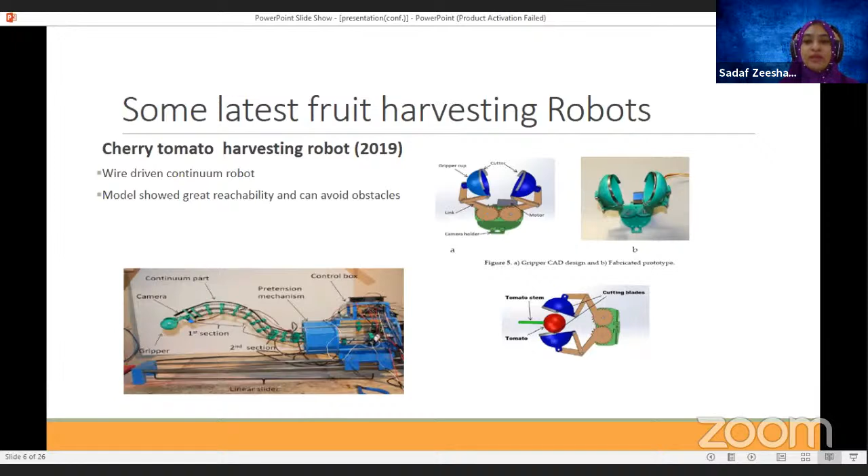Similarly, another design that has been recently made is a 5 degree of freedom robotic arm with scissors and grippers. So it is like a flower. It engulfs the fruit, the strawberry fruit, and then it closes. And there's a separate scissor mechanism that has been designed to cut the branches of the strawberry.

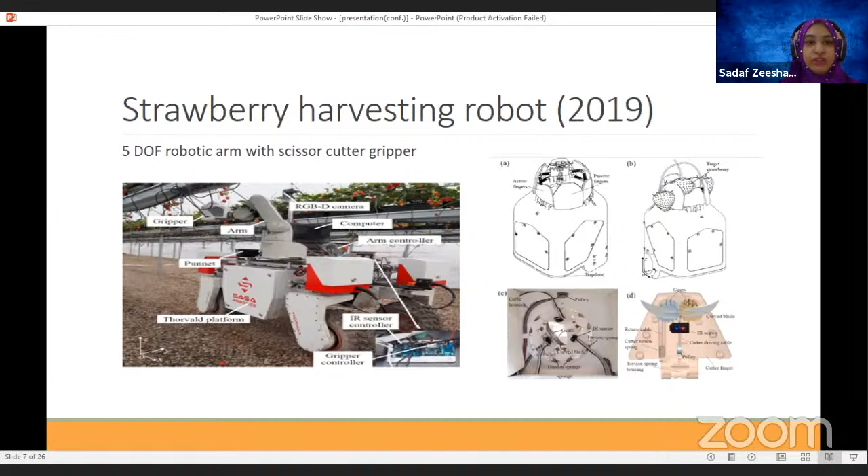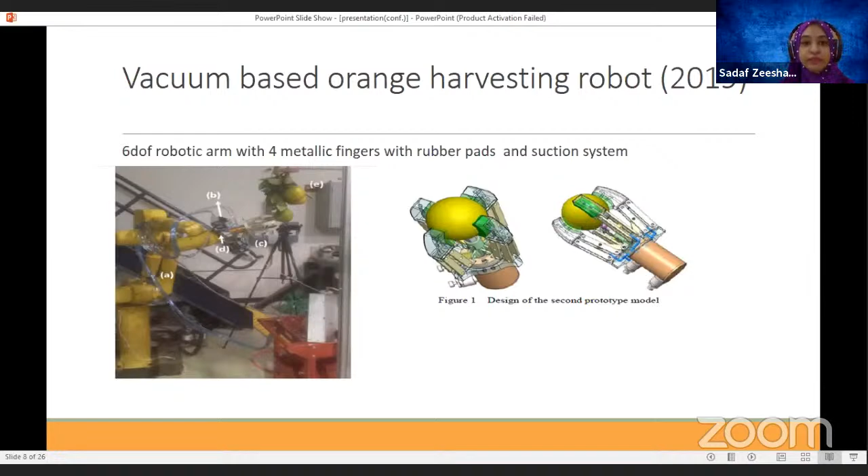Similarly, a vacuum-based orange harvesting robot has also been recently designed, which consists of a 4 gripper finger with small pads attached to the edges to prevent damage. And it's based on a suction system so that the grip holds and it is not disrupted. Another design that has been recently drawn is similar to the previous one, but it is able to avoid obstacles by pushing the irrelevant fruit and moving directly towards the target fruit.

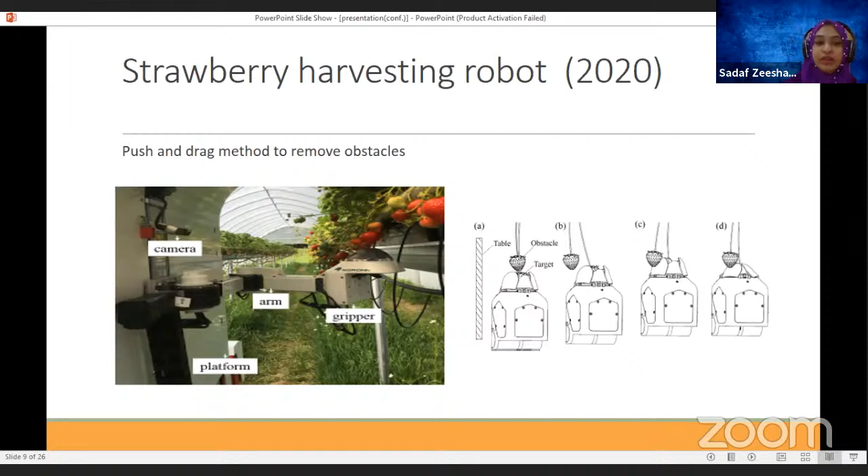So our research is also based on a fruit harvesting robot. Our research will focus on the automation of harvesting of one of the top fruits in Pakistan, oranges. Oranges are exported to many countries, the oranges of Pakistan are very famous, and it's one of the top export fruits in Pakistan. So our research project aims at designing and developing a 6 degree of freedom robotic arm with a soft gripper. We are not going to use a metallic gripper. We're going to use a custom designed and optimized soft gripper, which is going to help harvest oranges in the best possible manner.

The prime design parameters include modeling of a 6 degree of freedom robotic arm. We're going to do the path planning and optimized gripper design for orange picking. Then we have detection of the oranges by using RGB color recognition and a control system design using Arduino. For this presentation, since there are a lot of parameters, we're going to focus on the two prime areas, that is the path planning and the optimized gripper design.

So the objective is to design and fabricate an orange harvesting robot to assist in quality picking of fruit best suited for export, and to validate through experimental testing in the field the efficient and quality fruit pickup by the orange harvesting robot. The problem statement, the reason why we wanted to do this project, was to address the gap in our agricultural sector and the issue of not using a lot of technology in the agricultural sector. So we want to address this gap by using an automated agricultural robot to enhance the export quality of fruit harvested. And we want to prepare Pakistan for the fourth industrial revolution by adopting emerging technology and to increase food production as well as quality.

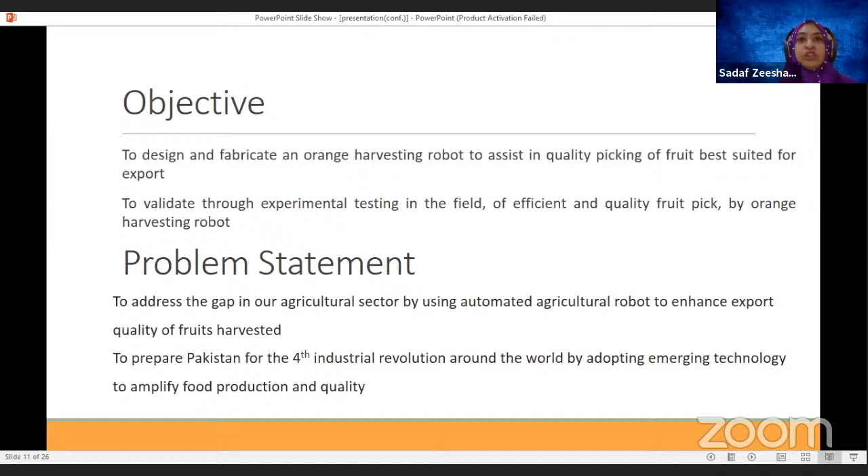So the first thing that we did in the path planning was the kinematic analysis. The kinematic analysis is made up of two parts, the forward kinematics and the inverse kinematics. In the forward kinematics, we determine the end effector position. So the robot will determine the exact position of the end effector, and this includes three parts. First is the defining of frames. Now we define the exact number of joint angles in the frames. As you can see in the upper picture, we have defined the frames, where red shows the x-axis, yellow shows the z-axis, and black shows the y-axis.

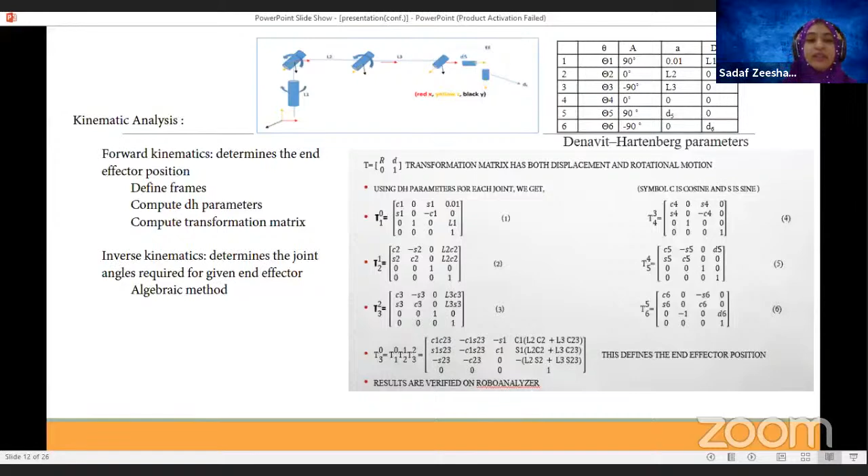Next, we are going to determine the joint angles for the given end effector, and this process is known as inverse kinematics. Now, there are many methods used for inverse kinematics. The method that I have used is the algebraic method. In the algebraic method, we use various algebraic formulas, the cosine rule, and projections, and then based on those projections, we determine the joint angles.

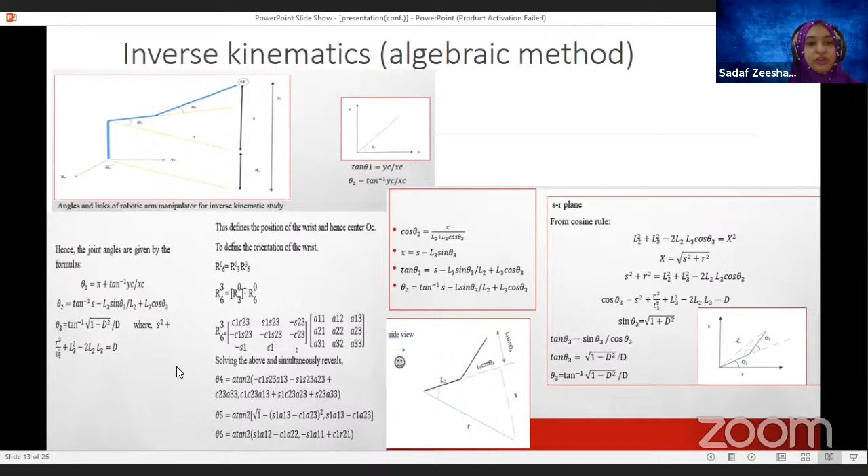So we have calculated joint angles for all 6 joints: theta 1, theta 2, theta 3, theta 4, theta 5, and theta 6. This is all done based on the algebraic methods. Now, once the forward and inverse kinematics have been done, we use the software RoboAnalyzer to verify if what we had calculated was correct. So, does this kinematic analysis actually work?

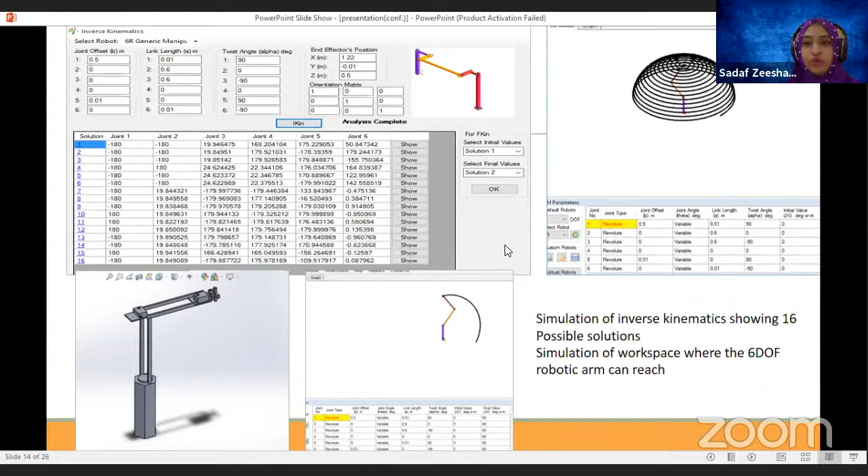Next, once the workspace had been defined, we chose one end effector position within the workspace. We input it here, and then we determined the possible joint angles the robot needs to take in order to reach this particular position. We came up with 16 possible results: for this one position, 16 possible joint angles are possible. So this was the inverse kinematics, and this verified it. We also simulated the forward and inverse kinematics and verified our results as well.

Next, we did the dynamic analysis also. There are 2 methods used to determine the velocity of the robot: the Newtonian method and the Jacobian method. In robotics, the Jacobian method is preferred, and we also used it. The basic idea is that the derivative of the end effector position is equal to the Jacobian matrix multiplied by the derivative of the joint angles. We already have the end effector position from the previous slides. We take the derivative of that. The lower portion, alpha, beta, gamma, is the orientation of the end effector.

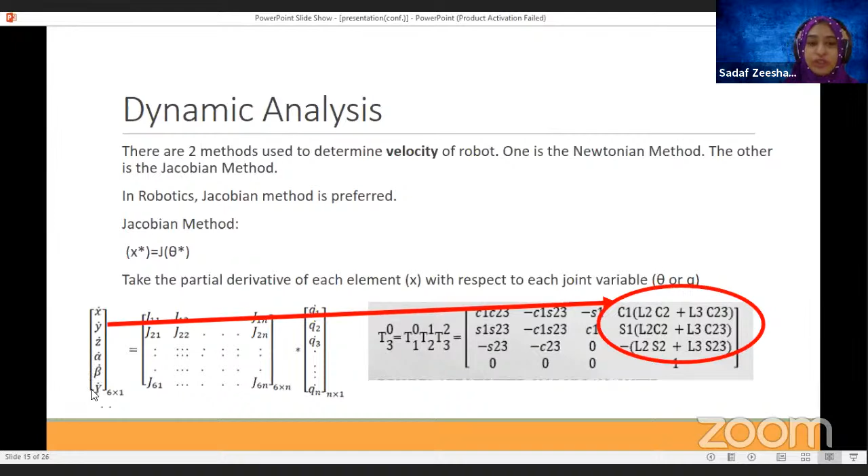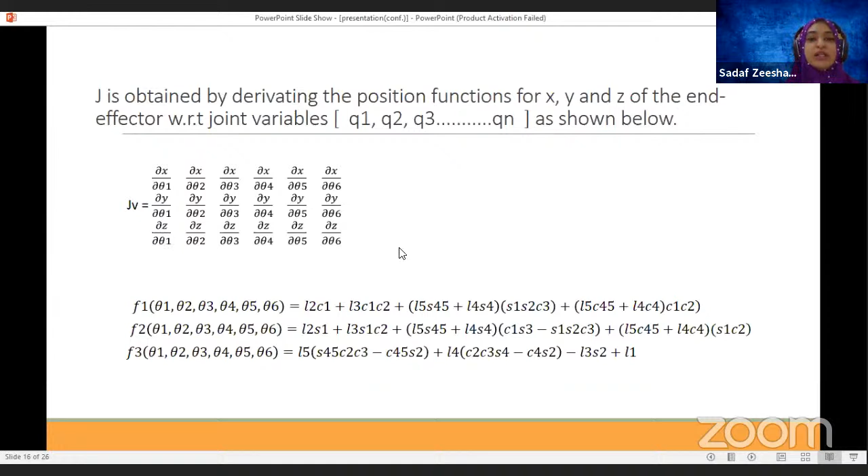So we determine the Jacobian matrix by taking the end effector position delta x, delta y, delta z, and one by one taking the derivative with respect to the joint angles theta 1 to theta 6. Similarly with delta y from theta 1 to theta 6, and similarly for the z-axis position, and we get the speeds of the various joints. So by this method, we can determine the speed with which the robot and its joints are going to move.

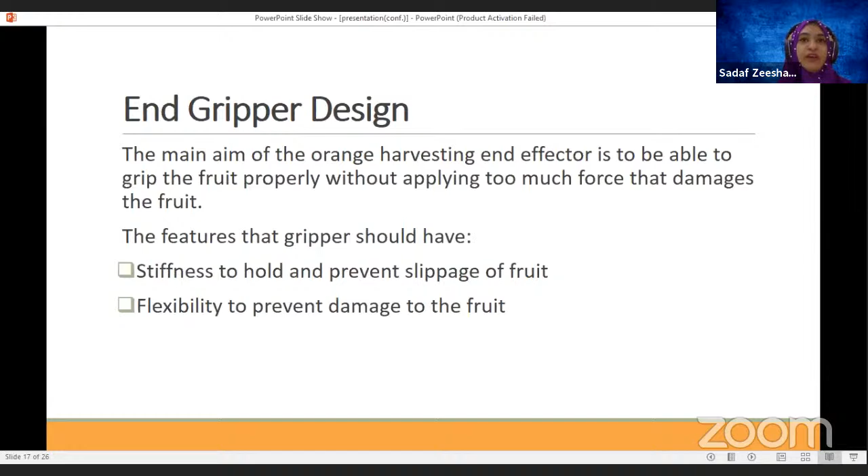The next portion of the research is the end gripper design. The end gripper design is very important in this whole research, because if you do not grip the fruit properly, it can damage the fruit, and then it is of no use. We need the robot to grip the fruit properly and without damaging it. So the 2 features we are looking for in our gripper or end effector are that it should be stiff enough to prevent slippage of the fruit, and secondly, it should be flexible enough, with a good modulus of elasticity, to prevent damage to the fruit.

The first step for the gripper design was the compression test. We took a number of export quality oranges, and first we took the circumference from the center of various parts and took the dimensions. After that, we performed a compression test and found that the maximum force an orange can bear before it shows signs of damage is 80 Newtons. From the circumference, we found that the gripper should be almost half of the circumference of the orange, so our gripper should be designed keeping that in mind.

Mold design: we are using a soft gripper design in the research. We do not want to use a metallic gripper because that can damage the fruit and its quality. Since fruit is a delicate object, we want to design a gripper which is both flexible and stiff, a material of good quality that does not apply excessive pressure. So the material we shortlisted was Ecoflex 20.

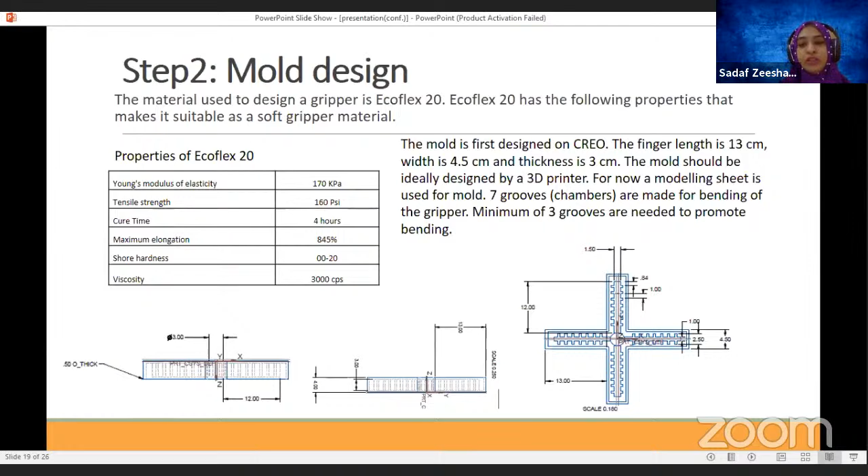The mold should have more than 3 grooves. We kept 7 grooves. The reason for keeping more than 3 grooves is because if you have less than 3 grooves, the gripper will not bend and not hold the fruit as we want. So we have chosen 7 grooves for it to bend in a proper manner and show a proper curve position to hold the fruit properly.

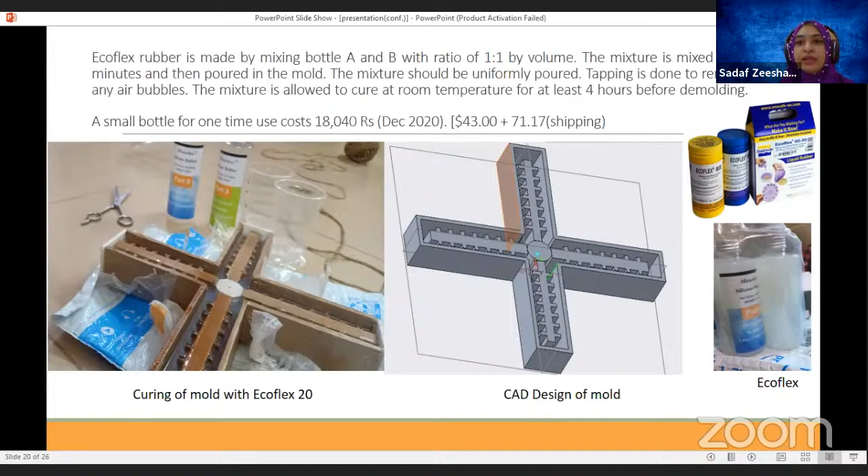Okay, so Ecoflex comes with 2 mixing bottles, A and B, and we can mix A and B accordingly to adjust the hardness and the flexibility as we desire. We used the ratio 1:1 of both A and B, and once the mold was made, we poured the mixture over here and let it cure for 4 hours minimum. We let it cure for at least 1 day, a longer time for it to cure.

Now, the structural analysis of the soft gripper was also done. Since all 4 fingers of the gripper design are uniform and the same, if we do the structural analysis on 1 finger, it can be assumed that the others behave similarly. So we did the structural analysis only for 1 finger in ANSYS Static Structural. We imported the model from the CAD software, designed on Creo, into ANSYS Static Structural, and did the structural analysis by applying static pressure.

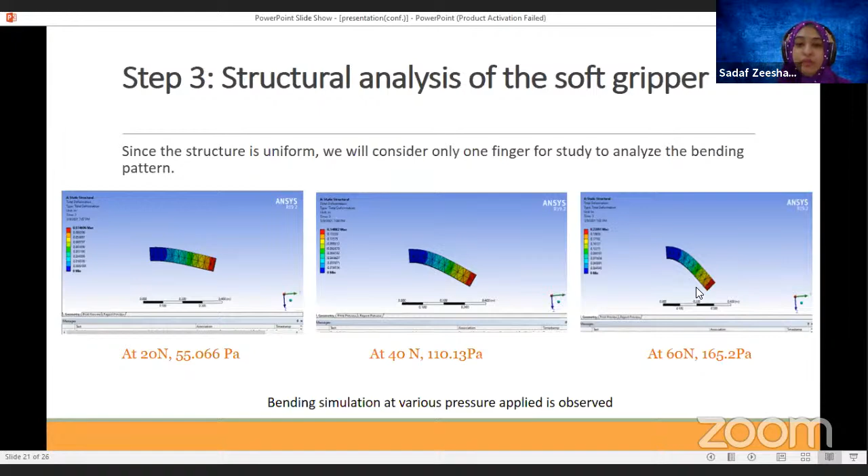Keeping the same criteria in mind, we applied the pressure 1 by 1 and saw how it behaves under pressure. We can see that as the pressure and the force increase, the bending increases. This shows us the relation of force versus the bending angle of the gripper. We calculated the bending angle for various pressures and found that for our maximum pressure, the deformation needs to be 42 degrees. So our gripper fingers need to bend at an angle of 42 degrees each in order for our fruit to be

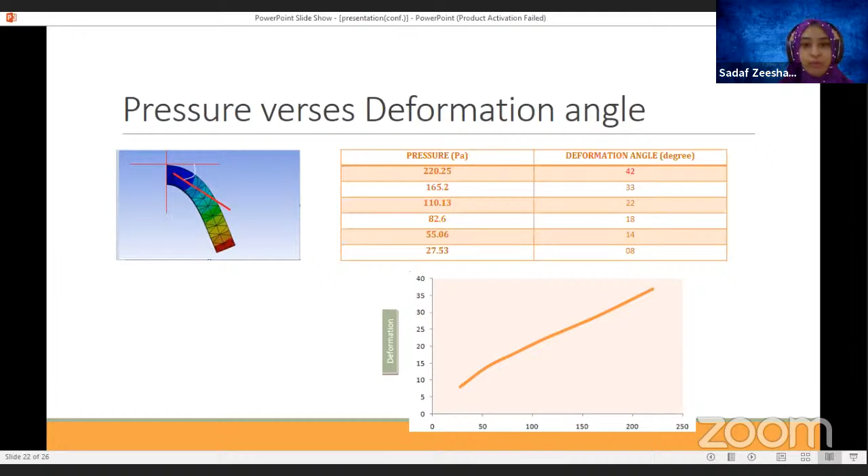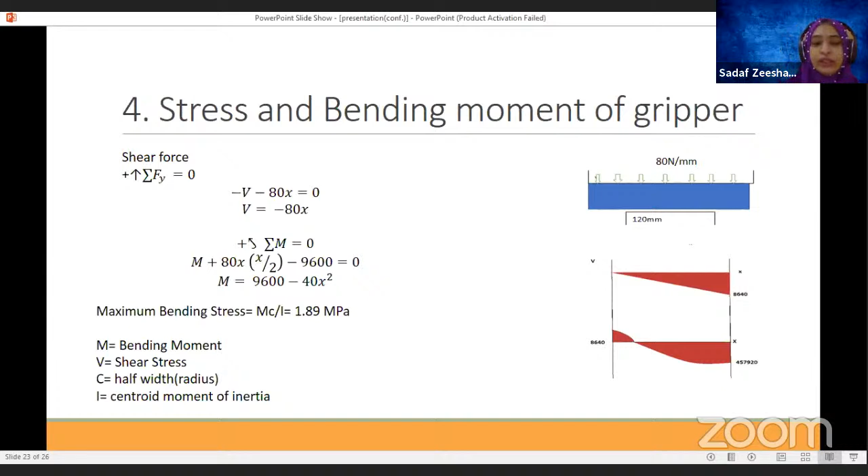held properly. We also did the stress and bending moment calculation of the gripper, and we found that the maximum stress it can bear is 1.89 megapascals, which is a very good value, keeping EcoFlex in mind.

The next thing left for this step is the testing. In the final testing with the end gripper, what we expect is that at an angle of 42 degrees, when we apply a force of 80 newtons, converted to pressure, it should be able to hold the fruit properly without damage with a firm grip. And we are hoping that the analysis done on ANSYS Fluent will be similar to the tested results.